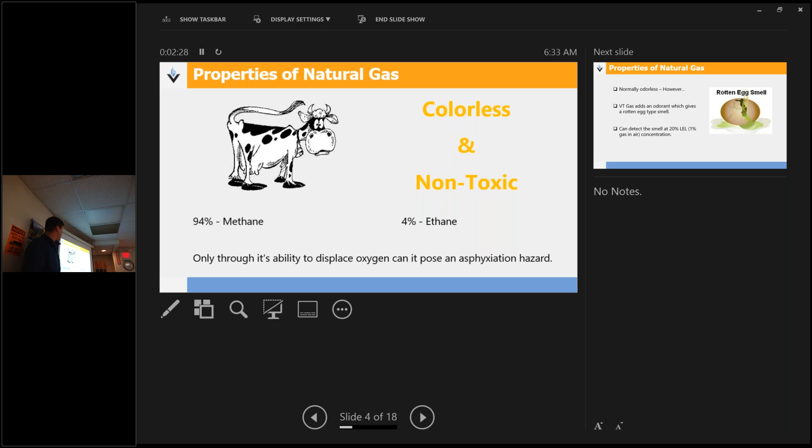All right, very important for working in confined space. If there's a gas leak, we need to make sure everybody gets out of the hole, out of a confined space, because what it's doing is displacing the oxygen, and then it could create a very life-threatening situation. So those are some of the properties.

Kind of continuing with some properties, normally it's colorless. However, Vermont Gas, they add odorant, which gives that rotten egg smell. So the reason for that is to be able to identify when there is a leak. So you smell that rotten egg, that means there's some type of leak potential, and we want to get on the horn and let them know.

The odorant, the idea is you can smell it when it's at 20% LEL or 1% of gas in the air is concentrated. So the idea there is to smell it before it gets into that lower explosive limit where it can potentially ignite. The idea is it's an initial warning sign letting you know that there's a dangerous condition there, and we need to put in the emergency procedures that we're going to talk about.

Just finishing up with the vapor density. This is very important. Natural gas is 30% lighter than air, so it's gonna rise and rise fast. All right. And then propane, it's a good one that everybody knows that propane is 1.56, so it's heavier than air. So propane is going to be kind of in our trenching and more in the ground if there is a propane line damage.

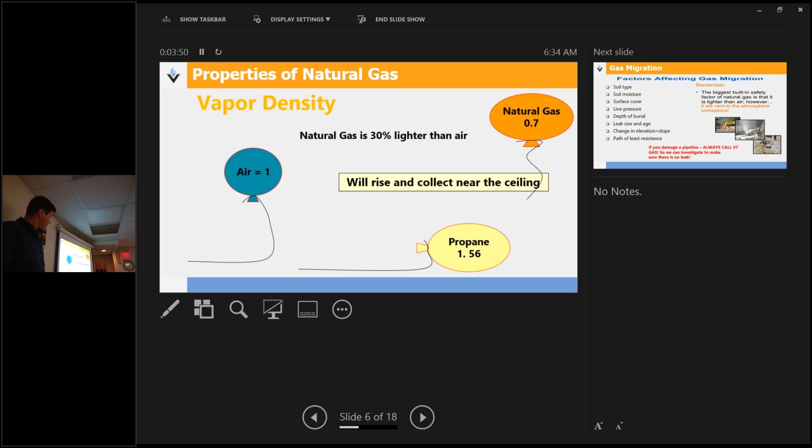So some of the factors affecting gas migration, this is becoming a real hot topic over the last couple of years. The factors affecting the gas are soil type, especially right now when there could be frost in the ground, soil moisture, surface cover, line pressure, the depth of how deep the line is buried, how big the leak might be, changes in elevation and slope, or a path of least resistance.

So that's why we're going to talk a little bit more about best practices. If there is a gas leak, or you smell or you have a potential for a gas leak, we want to not cover it or expose it, crimp it, anything; we want to let it go.

Because if it's not burning yet, what it is, it's flying high into the atmosphere and it's going to be safe, and it's not going to do what we have later in this presentation regarding some of the big explosions that you've seen throughout the news in the last months, but also years. There's been some pretty severe casualties. So remember, the biggest built-in safety factor of natural gas is that it's lighter than air.

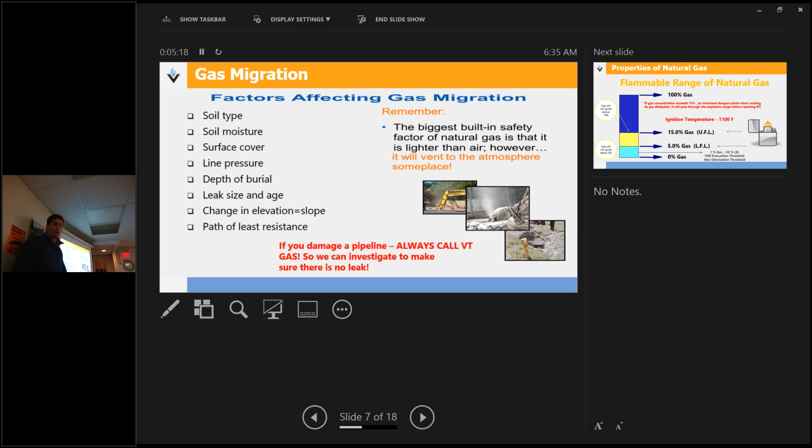However, it will vent to the atmosphere someplace. So we want to give it a way to go. So if you damage a pipeline, always call Vermont Gas so we can investigate it and make sure there's no leaks. Again, call 911, and we're going to talk about that in a little bit.

So with the flammable range, the ignition temperature is 1,100 degrees Fahrenheit. Gas will not ignite above 15%, it means it's too rich to burn, or gas will not ignite below 5%, it means it's too lean to burn. So this is the sweet spot. When we have between 5% gas to 15% gas, a mixture of natural gas and the air in this room, if we make that perfect concoction, all it needs is a source, a spark, a match, and then you got those big explosions. So that's really good information to know.

So when there is a gas explosion or a gas leak, everyone's like, do I shut the excavator off? Do I not? The best thing is to probably back away. Either leave it running if everything's fine, or do shut it off and then just walk away and make those phone calls.

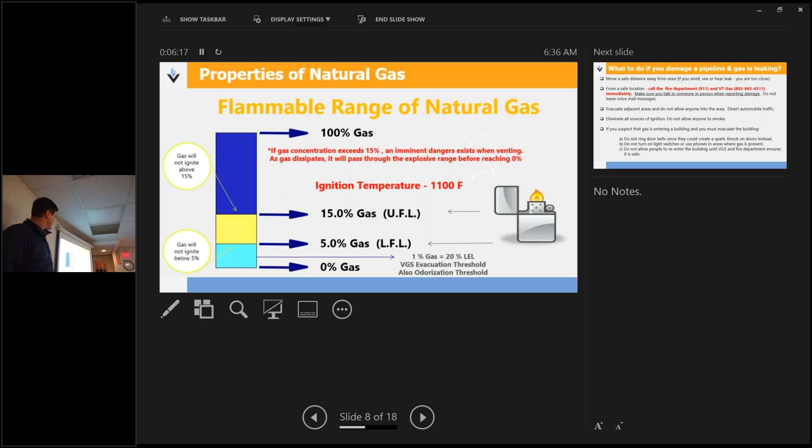So what do you do if a pipeline is damaged and gas is leaking? Move a safe distance away from the area. If you smell or see a leak or hear a leak, you are too close. From a safe location. Call the fire department, 911. Call Vermont Gas. Again, this is on the ECI app emergency contact list for utilities. It's 802-863-4511 immediately. Make sure you talk to someone in person when reporting the damage, and do not leave voicemails or messages. Get somebody alerted.

Evacuate adjacent areas, and do not allow anyone in the area. Eliminate all sources of ignition. If you suspect the gas is entering a building, you must evacuate the building. So again, that's why calling 911 is big, because that's what the fire department loves to do. They get there and they just get everybody out of the house. Be proactive. If we're digging in a residential area and we hit a service, let's just do our due diligence and try to make the environment as safe as we can for everybody.

So if you suspect the gas is entering a building, you must evacuate. Do not ring doorbells. That is a potential source of ignition. So knock on doors. Do not turn on light switches or phones in the area where gas is present, because again, that could be that ignition if it's in between that 5 and 15%. And then do not allow people to re-enter the building until Vermont Gas and the fire department say that it is safe for us to get back to work.

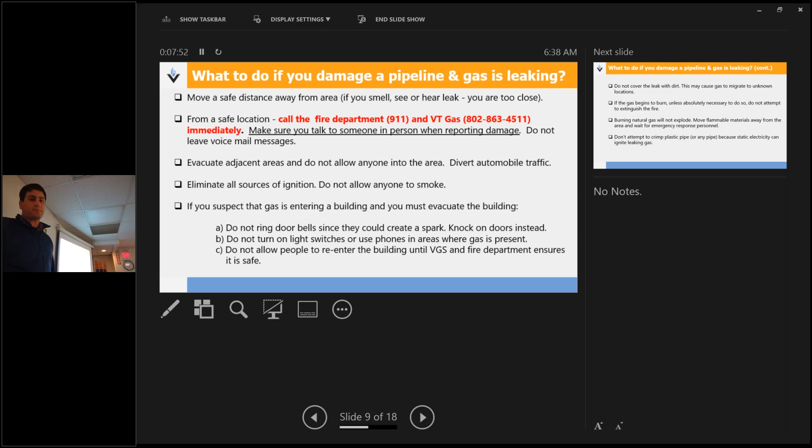So just concluding on that, do not cover the leak with dirt. Why? Migration. Remember, we don't want it to go into people's basements. We want it to just flow high into the atmosphere. If the gas begins to burn, unless absolutely necessary, do not attempt to extinguish the fire. What we then have is a big Bunsen burner, at least it's controlled and it's there, and everybody can just spread out. The optics of it aren't great. It looks dangerous, but at the same time, it's just a big Bunsen burner. So just everybody get away from it.

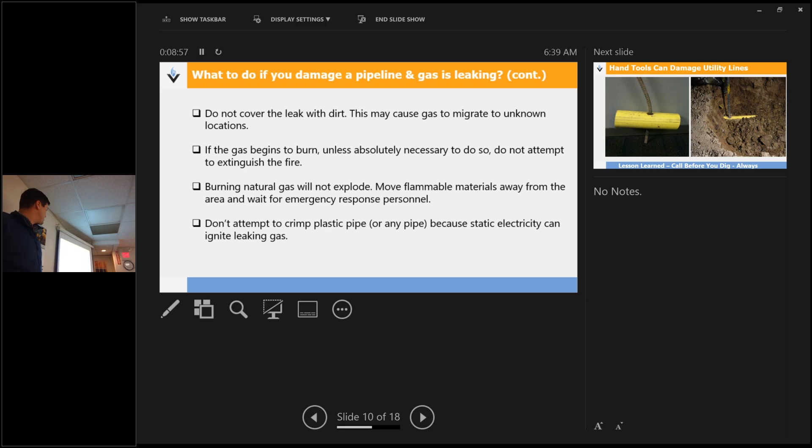So do not attempt to crimp plastic pipe or any other pipe, because the static electricity can then ignite. I know there's times where crews want to grab it, cinch it down, throw a bunch of duct tape on it. They think they got it fixed, but again, there's that potential of static electricity charge there, and then you got a Bunsen burner on our hands, and it could be a very dangerous situation. So if it happens, let it go. Make the call. Let's get the professionals there to fix it the proper way.

Dave wanted me to remind you, this happens every year to Vermont Gas: hand tools, driving stakes, driving curb pins around distribution or services, house services. It happens very frequently where we drive a curb pin through. These are actually more pictures that are on their distribution line.

But it can happen. So I always call before we dig. We're going to talk about dig safe in the next couple of weeks more and more. There's some changes that I'm reviewing now regarding some of the new writing that are in the statutes.

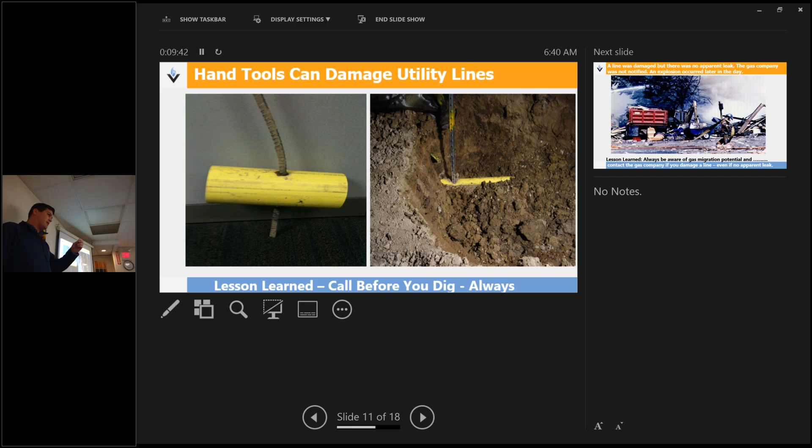So here's some kind of lessons learned. Here's a line that was damaged that did not appear to leak. The gas company was not notified, and then an explosion occurred later in the day. Make sure you always be aware of migration potential. As Dave said, if we come across a line that we didn't damage but it looks damaged, call them. They want to come out and take a look at it. They want to make sure that the integrity of their services out here are in the best possible condition, and while they're exposed, it's a good time for them to come and fix them.

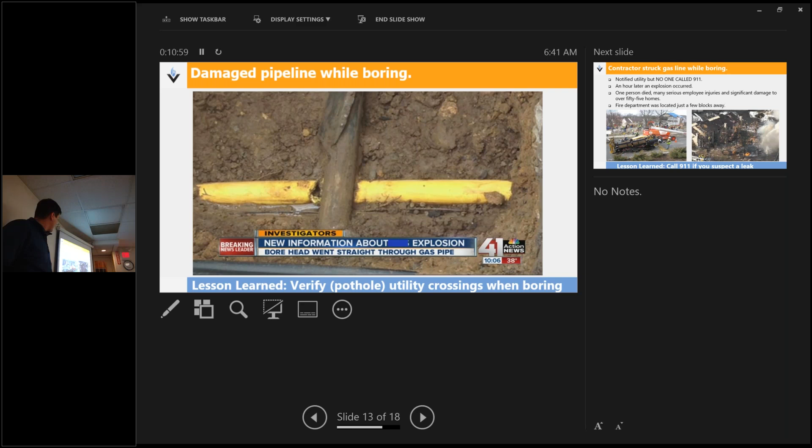Here's another one that we talked about last year. Here's a good example of why it's very important that we always verify by potholing anytime we're crossing any gas services through directional drilling or with our excavators. Because here's a perfect example of a potential hazard. They drilled right through what looks like a 2-inch distribution service. So again, if you do strike a gas line, notify.

What happened with this one, with the explosions that you see on that left slide, is no one called 911. They had a leak. No one called 911 at all. An hour later, the explosion occurred because it was leaking, and then it was migrating due to the air temperature and the ground condition. The leak wasn't 100% going into the atmosphere. It was migrating and ended up migrating into the buildings. The gas started entering the buildings, got into the basement, and then it found that right sweet spot between 15 and 5%. And it just needed an ignition source, found it, and then boom.

You see how many condominiums there. It was a very big explosion. Luckily, only one person died, but again, one is too many. A lot of people had serious injuries and significant damage, over 55 homes. So it was a very big explosion that made national news. So lessons learned: if you suspect there is a leak, let's get on the horn, let's call 911, and let's call Vermont Gas.

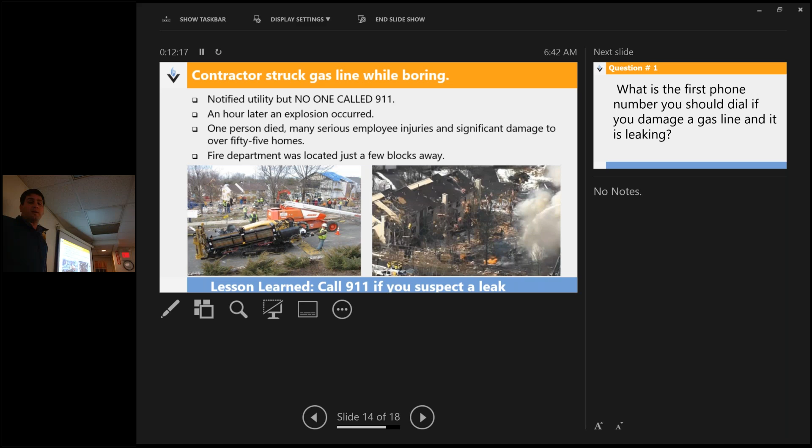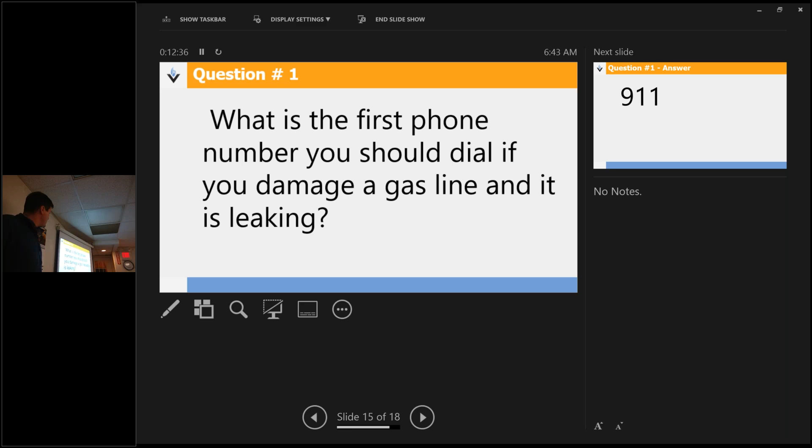So in conclusion, we want to do our due diligence. What color is natural gas when it comes to underground utilities in the pre-marking process? Yellow, all right. So you see yellow on the ground, we've got a gas service, we need to take proper precautions. And then Dave wanted to really hone this one in. What is the first phone number you should dial if you've damaged a gas line and it's leaking? 911, perfect. And what is the second phone number you should dial if you damage the gas line and it's leaking? I don't expect you to remember this. Or yeah, exactly, good. 802-863-4511 is the Vermont Gas landline.

So they're out there. They're our best locating company. They're really good about their marks. We have a good partnership with them, with the Common Ground Alliance. So knock on wood, we've had a pretty good last couple years not damaging their stuff. But again, we want to make sure that we do our due diligence, planning ahead, knowing how to properly excavate and directional drill around underground gas services and their lines, so we don't have to put the emergency response plan in place. So, are there any questions regarding our best practices? Okay.

Thanks, Matt. So for announcements, you can be considering in the coming weeks, and we'll have more messaging about it, that we have the GoToMeeting link here and a number. So you don't have to be here in the meeting. You can watch it on your smartphone, your tablet, your computer, whatever. It looks like we have a thinner crowd, which is good, nice and spread out. Starting today, we have only live checks. There's not many people here anyway, but the idea would be that we would just hand out live checks, because you don't really need your check stub right away, and we would put all the check stubs in the mail, so there's not a lot of calling names and handing out stuff. So just an extra precaution, plus it's going to make us more efficient.

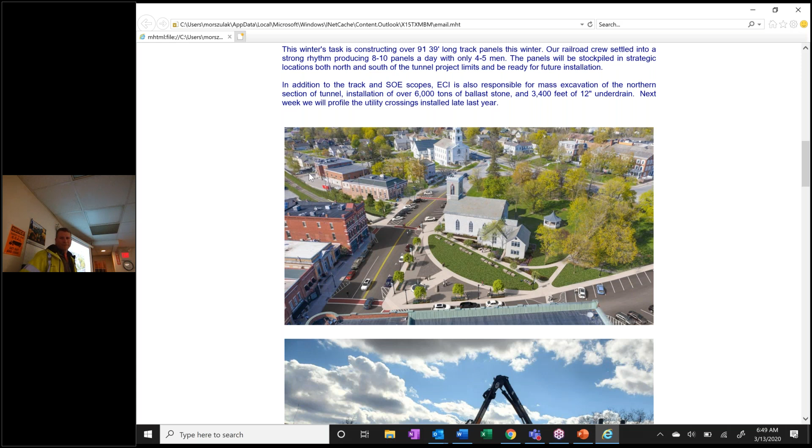And then in addition to the track and support of excavation scope of work, we're also responsible for mass excavation in the north end of the tunnel, installation of 6,000 tons of ballast stone and underdrain. And next week, we're going to talk about some of the utility crossings that we did last fall. So there we go. There's that picture we had from last week. The rail goes right through town, crosses Main Street, crosses Merchants Row, continues on pretty much up to the Cross Street Bridge and back down to Exchange Street, roughly, right? That crosses over.

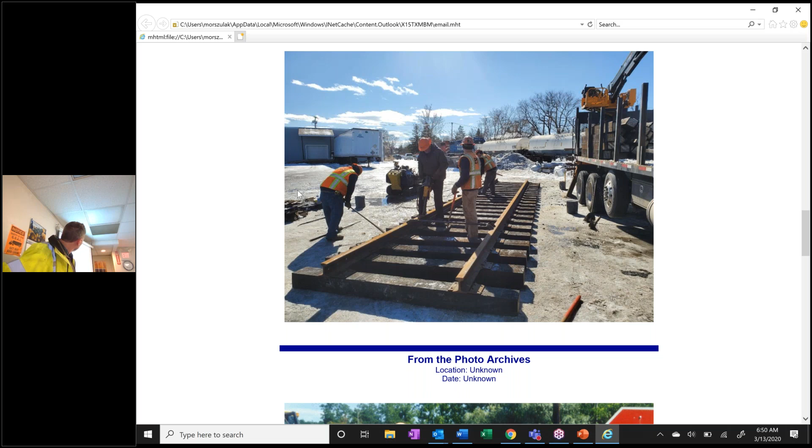And we got a couple pictures here putting together panels: new ties, used rail, used OTM, and pretty good cold weather work as far as cold weather work goes. And then it's just an old picture of some track work we were doing on the silent grade crossings back in like 2001 or something like that.

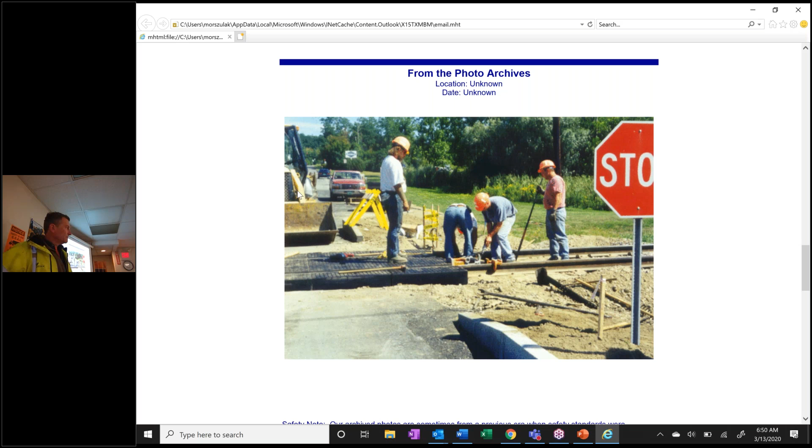I'm not sure which street this is on, but it's throughout from, well, it's Charlotte northward. I'm gonna say Burlington southward, but from Burlington to Charlotte, all the crossings on the Vermont Railway are still silent, so that there's no train whistle, which is typically required unless you have these special grade crossings. But we did the track portion there. Highly residential there, right? Yeah, it was because of the residential impact, so. Okay.

Jeff, want to hit the light for me there?